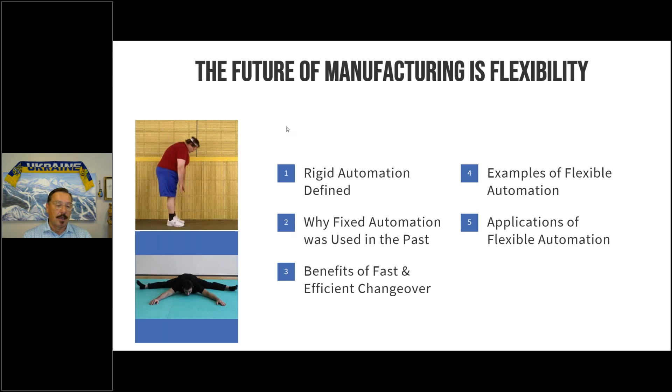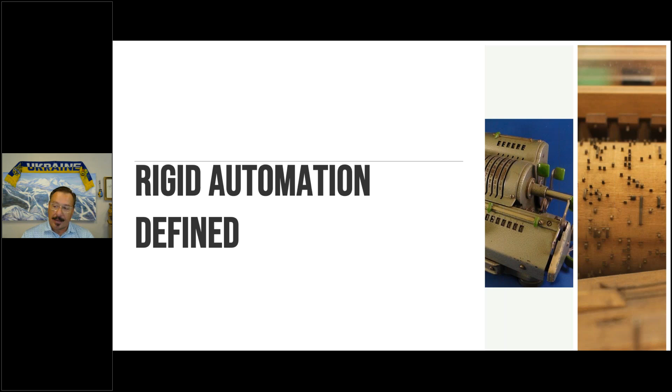So the first one is, what is rigid automation? What's the definition of it? I have two pictures up here on the slide which show you rigid automation, not necessarily for plastics, but historical. Rigid automation is something that is designed and used for one specific task. You see the counting machine on the left, and then the music making machine on the right. That's all they could do. They were not designed and could not perform anything other than those specific functions.

So what is rigid or fixed automation, and what are some of the reasons for it? It's automation that's customized around a single molded product. The handling of it, the way it's transferred once it comes out of a molding machine, the nesting of the products, if there's some kind of assembly work that needs to be done, inspection work - everything is designed for one specific product. Very little flexibility. The rigid and fixed automation was typically designed for a high volume, low mix type of production. So you produce that one part for years and years. It was designed to do high volume, so you could produce high cavitation. You could make a lot of those products all on the same system, but the system was designed specifically for that task. Changeovers were not possible or were very complicated.

The picture on this slide shows what you needed to do to get it to work. It took duct tape, it took baling wires. You had to do a lot of rigging to make this fixed or rigid automation workable on other products or on different applications. And it took a lot of technical expertise - almost to the level of needing a PhD to figure out how to get it to work.

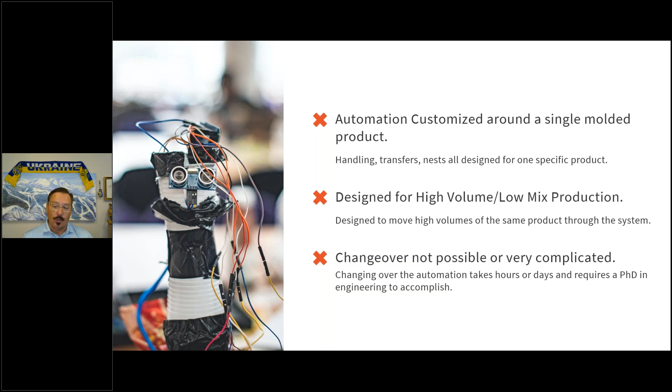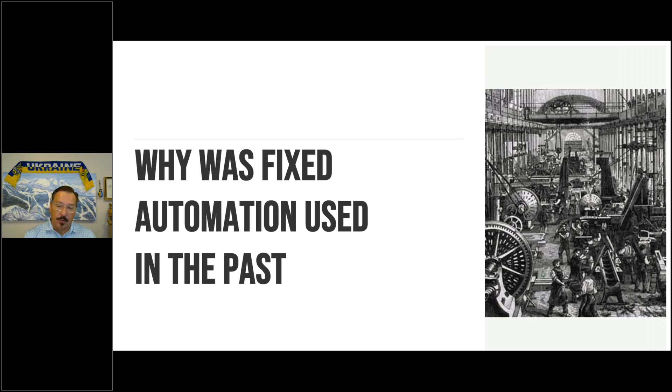So why was fixed automation used in the past? And when I say past, historically, the majority of automation was fixed. We've seen changes towards the more flexible automation in the last 3 to 5 years, with the biggest jump in changing over to flexible automation since COVID. I'll go through some of the reasons that we see that happening.

So why fixed automation? Why was it prevalent? Long product life cycles was a big driver. I have some examples listed here.

Televisions. In the past, you bought a television and had it for 10, 15 years. There were very few variations in televisions until fairly recently. Now every year there's new resolution coming out, new TV sizes, new features, wireless features. That's just an example of what's happening in industry overall.

The next one is mobile telephones. I remember the first phones that I had, and most everyone had a flip phone, and you kept that for years. Now every year Apple's coming out with the next one, the latest and greatest. Constant changes, so product life cycles are becoming much shorter.

Cassette tapes, same thing. Decades of cassette tapes, no changes. The molders running cassette tapes never had to change that automation because it was always the same size dimensionally. Nothing changed, so you just kept running it with the same automation.

The final one is the big brands with food products. An example is Kraft Philadelphia cream cheese, and the other is Kraft mac and cheese. The mac and cheese has been out there for decades without a change, and now Kraft is looking at changing the name, the recipes, the packaging, which has an impact on how it's going to be molded.

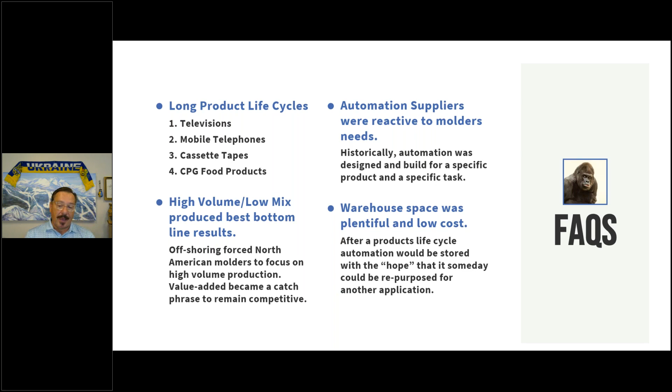It stays in the warehouse until someone decides they need that space and calls a scrapyard, and then it's junked.

So shorter product life cycles for a molder means there's going to be changes. You will not be able to run that same product for 10 or 15 years as you did in the past. Contracts now are sometimes renewed every year and sent out for bidding every year. So in a year's time, that automation may be obsolete for that specific product, and it needs to be changed over to something new or put into that graveyard in the warehouse. So flexibility is critical.

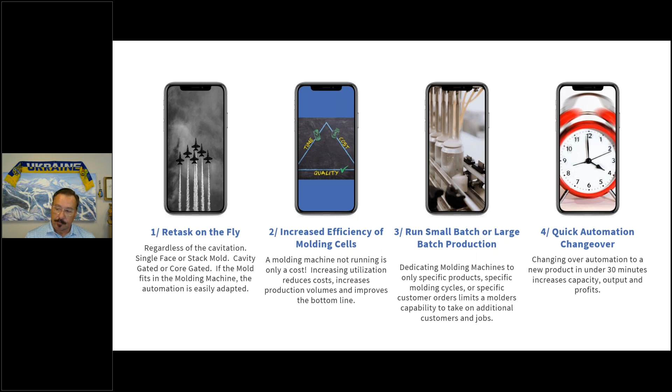Now I'm going to go into some examples of flexible automation. So I'm going to hit on some of the biggest ones that we've used and the applications. There's other ones out in the market that are being used. Some are a little more specific for different applications, so I kind of use the ones that are the most general and most wide used.

It's important to pick the right automation for the application, and each of the four that I'm showing here, and I'll go into more depth on these and show examples, are specific to certain actions that the automation does.

So the first one is takeout robots. What we supply is high-speed side entry robots that are very versatile and flexible and designed for maximum capabilities. So as I said before, whatever will go into the molding machine, this automation is easily adaptable to run that type of a product. One of the other items why this is a side entry and why we focus on side entry: in the past, we've built quite a bit of top entry automation. And what we're seeing in the market is a lot of people going away from top entry automation, primarily due to safety concerns. Not wanting employees to have to go up high in the air or need to have special safety harnessing or special safeties in place to use the top entry types of applications. So the side entry is something that we're seeing a lot of movement towards.

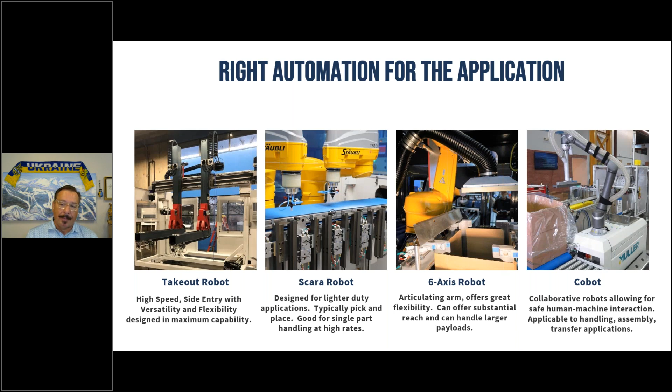Now I'm going to show you some examples of actual applications. The first one is the side entry takeout robot.

Hello, I'm John Taggart, Vice President of Engineering, Muller Technology, Colorado. This is the inline robot. It was a joint development between Muller Technology, Colorado and Muller Technology, Switzerland, with the goal of developing a platform that could be rolled out worldwide.

Hello, I'm John Taggart, Vice President of Engineering at Muller Technology, Colorado. This is the inline robot. It was a joint development between Muller Technology, Colorado and Muller Technology, Switzerland, with the goal of developing a platform that could be rolled out worldwide.

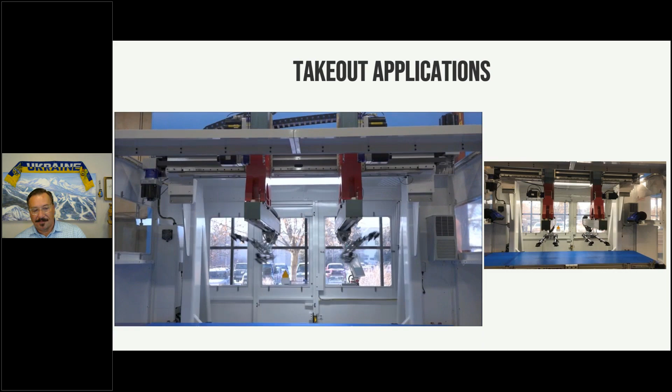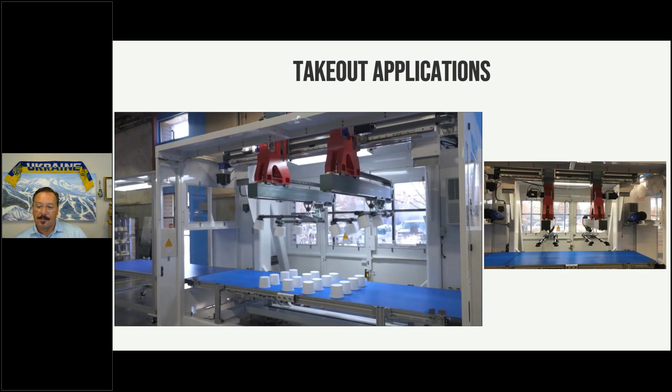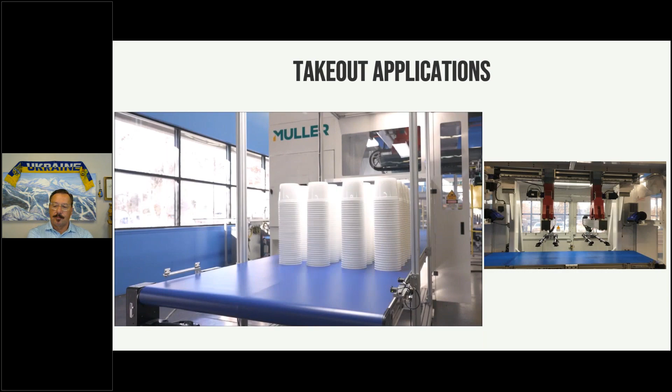Our goal in designing this side entry inline robot was to make one robot capable of running with any mold you put into a molding machine, whether that's a stack mold, single face mold, inside gated, or outside gated. This robot can handle any of those mold configurations. It's capable of stacking up to any number of parts you want, and that's recipe selectable—just change it and push the button. The robot has incredible flexibility with 4 axes on each arm, all motor controlled. Rather than multiple handoffs, we're capturing the part with one tool and placing it directly on the conveyor.

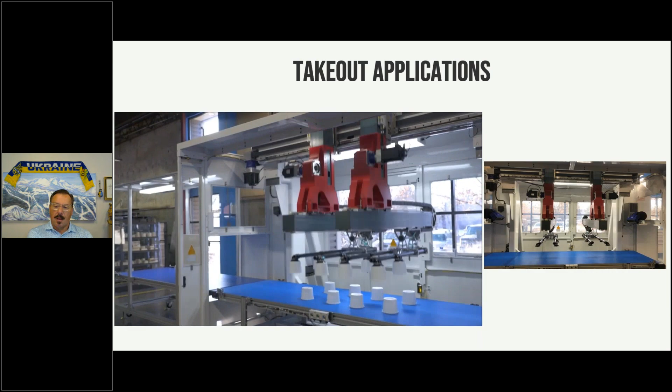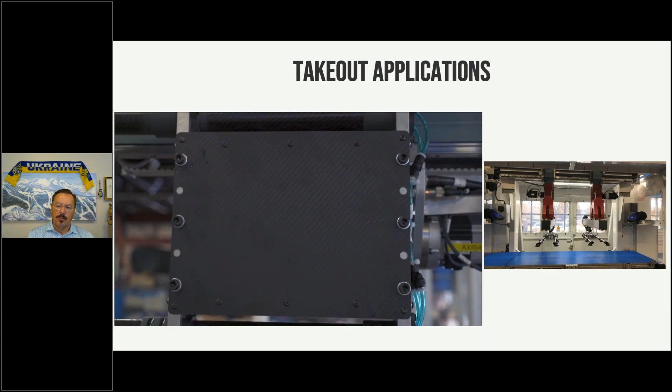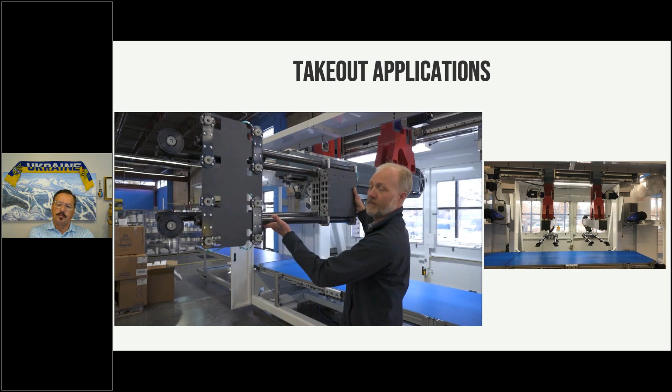For this new arm design, we've spent extensive time working on FEA to make sure we get stiff, stable arms that eliminate shakes. In addition, our tooling changeover has been greatly simplified. We're down to 6 bolts and air quick disconnects on the back—the entire tool comes off, then you can bring a new tool in. Tooling is lightweight, one person can hold it up, dowel pin to align it, put it in place, put your 6 bolts back in, hook your air in, and you're ready to run. We can accommodate anywhere from 1 cavity up to 48 cavities. Very flexible, very lightweight, very fast, very rigid.

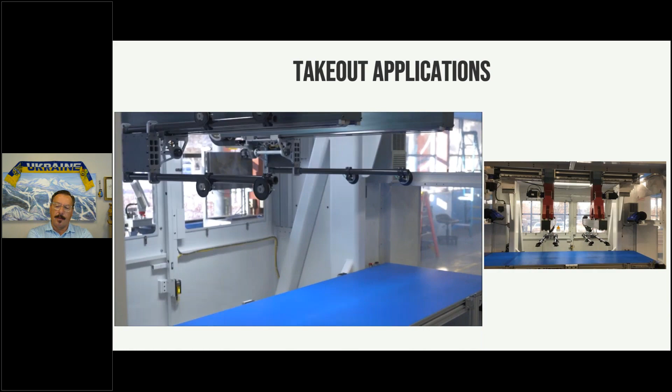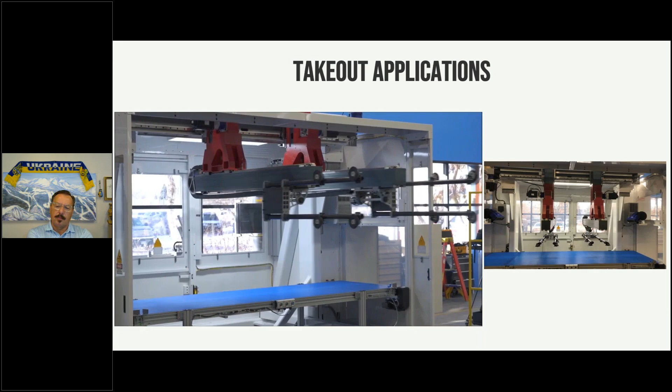Our end-of-arm retrieval carriage has the capability to rotate a full 180 degrees, and this is what allows us to pick either face of the mold with either arm. That's recipe selectable at the HMI—you just tell it which mold face you want to pick off of, and it will home accordingly, pick off that face, and move forward.

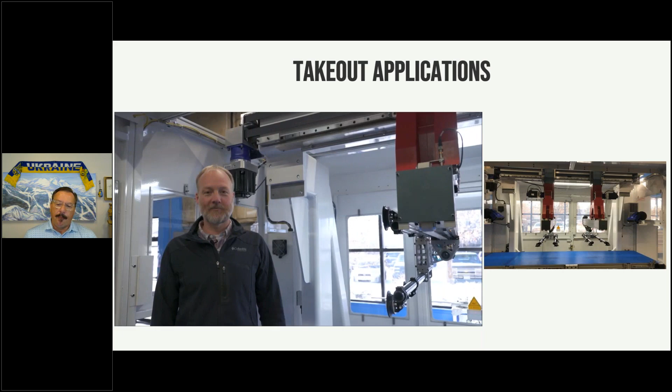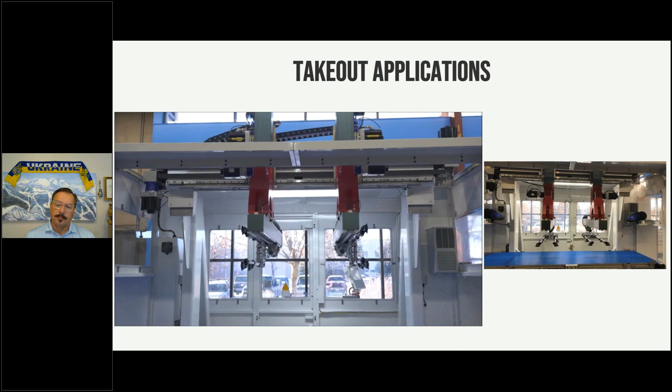For each of our arms, we have independent servo control in the strip stroke direction, or the clamp direction of the mold. There's a motor that drives the belt and gives us full control over where that arm is when it's moving in and out of the system. Once we're in position, we're always verifying with the linear transducer that we are in position so we're sure it's clear to go into the mold. In addition, if your mold center line height changes, we have a separate bolt pattern that lets us move our entire traverse beam up and down to adjust the center line of your mold.

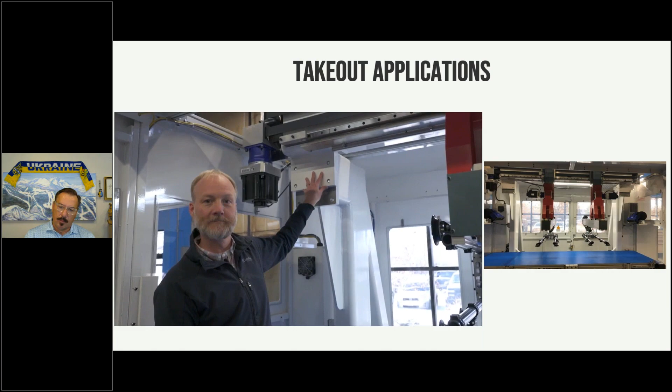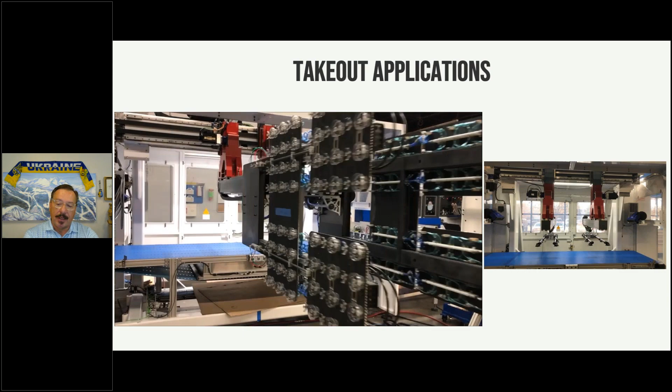This is another application that I'm showing, actually running in our shop. Our customer will not let me show you the actual product—this is for a 2-piece closure molded in a family mold. We actually take out both products at the same time and then use the automation to assemble the one piece to the base of the closure.

You can see the cavitation. This is the same exact robot that was shown in the previous video, absolutely no different in the base setup. The only difference is in the end of arm tooling.

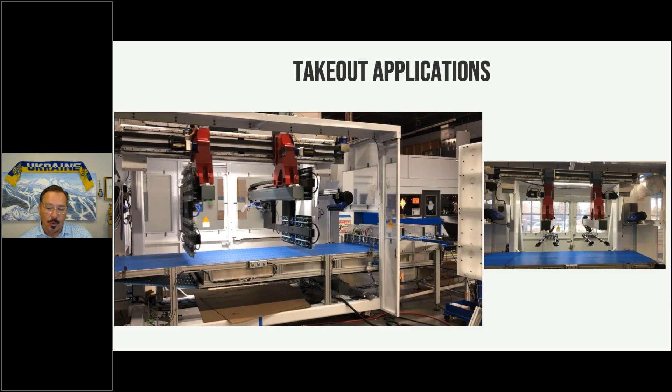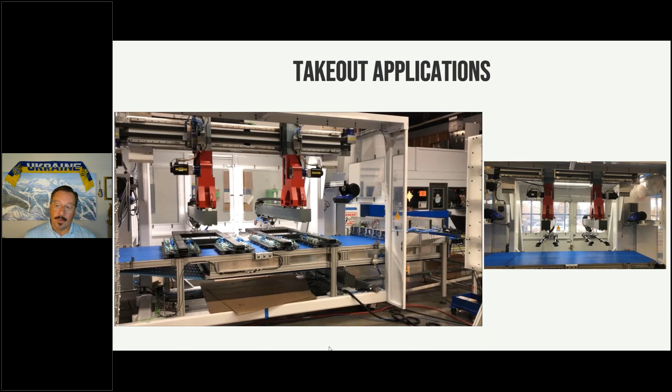The critical part with these takeout robots is the flexibility and versatility. You can run 2 arms if it's a stack mold. If it's a single face mold, you turn off 1 arm and the second one keeps running. We've built these up to 4-level molds where customers are running single face, stack molds, and 4-level molds all on the same automation. Customers with this type of automation are seeing utilization rates above 90% because they can put whatever mold needs production at that time into the machine, and the automation will adapt quickly and easily to run it.

The next one I'm going to show is the SCARA. This is the pick and place application. Here I'm showing it for lids.

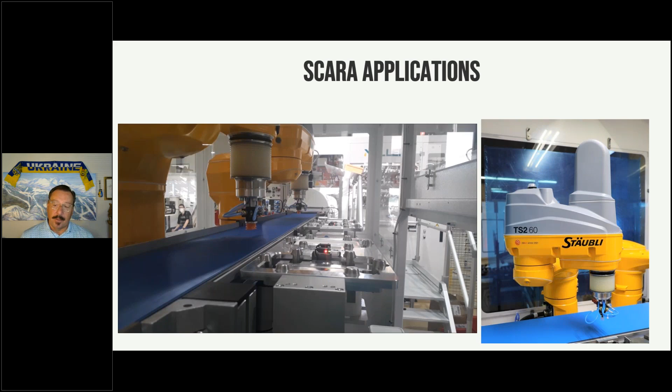The SCARAs that we use, we always use in conjunction with a vision system, so you can see the flashing at the far end of this video. The vision system takes a quick picture of each part, and as you can see, some of them are not oriented in the same direction, and you'll see one coming up that's quite skewed. The vision system sends a signal to the SCARA, which rotates and puts it into position so you can put it into a stacker, or if you're doing assembly work, the correlation between the vision system and the SCARA lets it do that alignment adjustment on the fly, again with high speed capabilities of 90 to 180 parts per minute.

The next one is the 6-axis robot. It has a lot of versatility, and in this video I'm going to show a number of different applications. The important thing to notice is the 6-axis is all the same, but the applications are very different, which shows the flexibility that's possible with the 6-axis.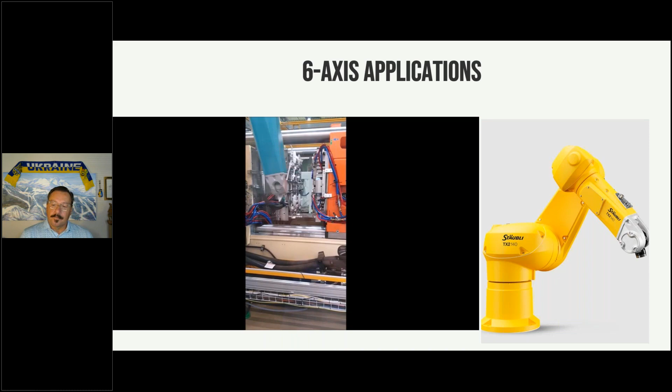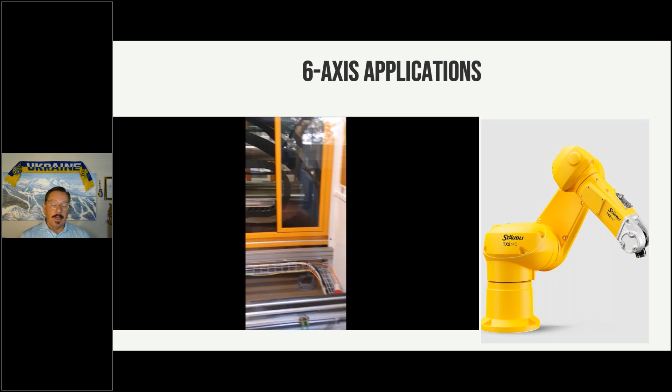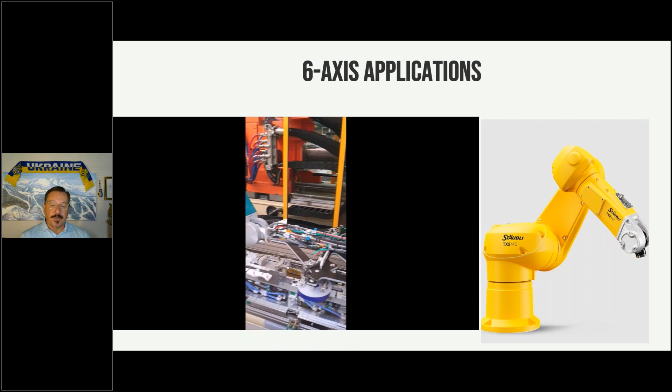So here, takeout. This is a hinged closure or hinged top. Pure takeout, placing it into a fixture, which will then go on and close that hinged top. Fairly simple application, just going in with a strip stroke using vacuum or grippers to grab the part out of the molding machine.

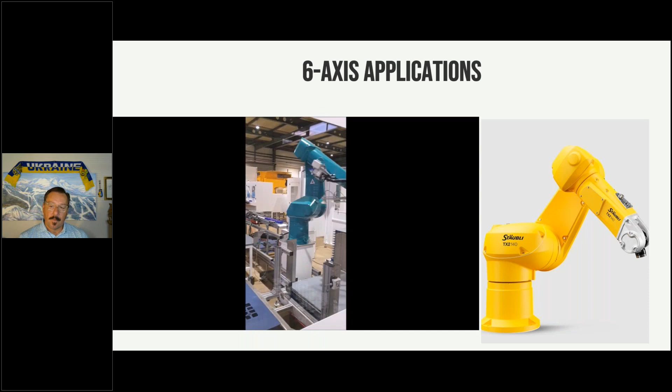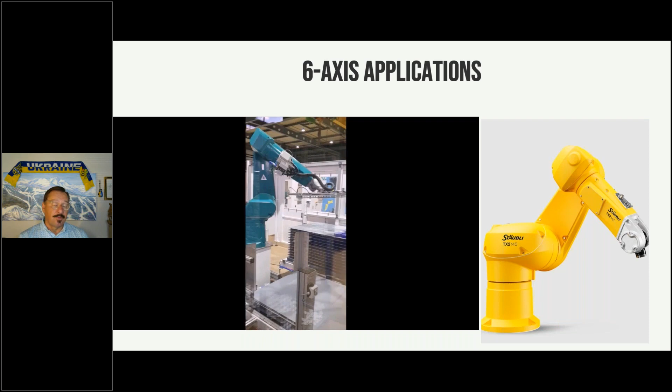Same type of robot here for palletizing. Placing a slip sheet for the next layer, then going onto the conveyor that's feeding the parts, picking up a row of parts in the orientation for palletizing, moving over and building the layer. The only real difference between the takeout and this palletizing is the end of arm tooling and then the programming, but very much flexible for different applications.

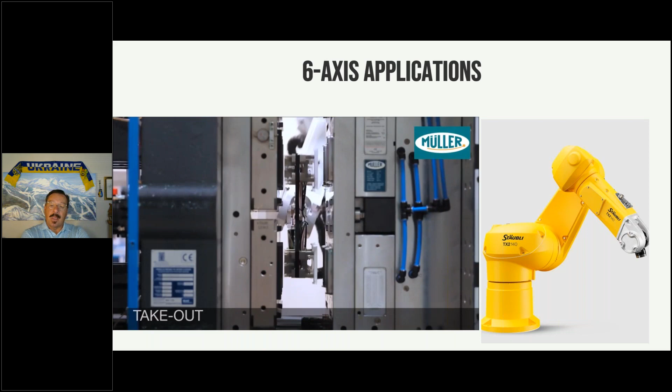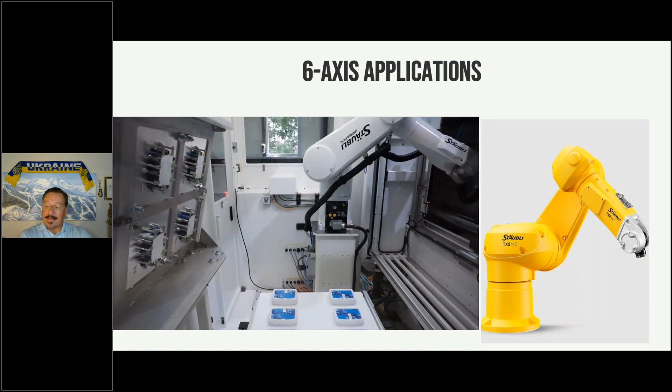This one is for an IML, in-mold labeling application. The 6-axis robot is taking labels from a label magazine, placing them into the mold cavity, taking out the finished product, and stacking the finished product when it is complete. Again, the only change out is in the end of arm tooling.

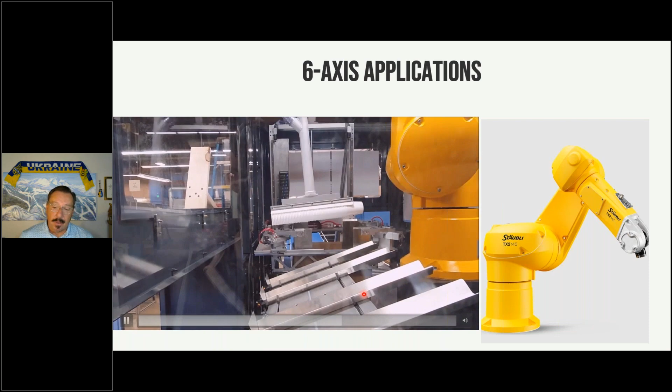Another application for a 6-axis: in this case, we're using a vacuum head, picking stacks of containers and case packing them. These case packers that we build are designed for different orientations in the box, different cavitations. You can see these trays, you can slide them together, move them closer or further apart. For the 6-axis robot, it's all positioning in the programming. You can pick as many different trays worth, different heights. All of that is a simple change out in the end of arm tooling.

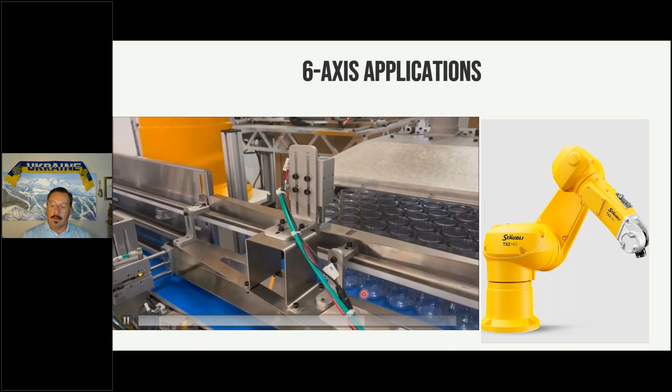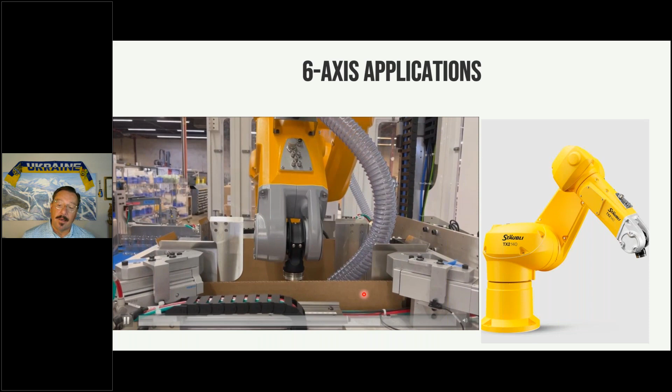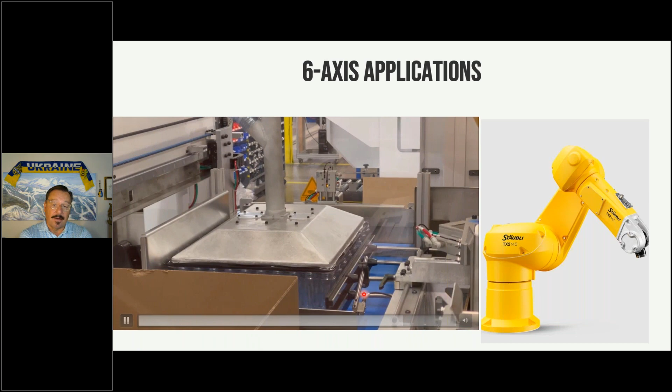The next one is a blow molded container. Here you can see the blow molded containers being sent single file into the system. We build a row, build an array, and then the 6-axis robot picks them up with a vacuum head and places them into the box, for different box orientations and different numbers of bottles in the box. The only change out, again, is the end of arm tooling and programming.

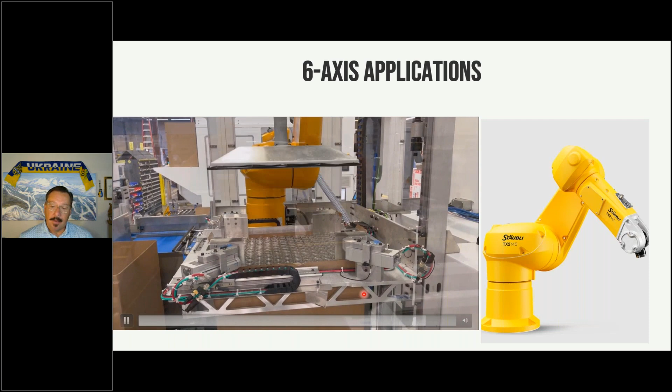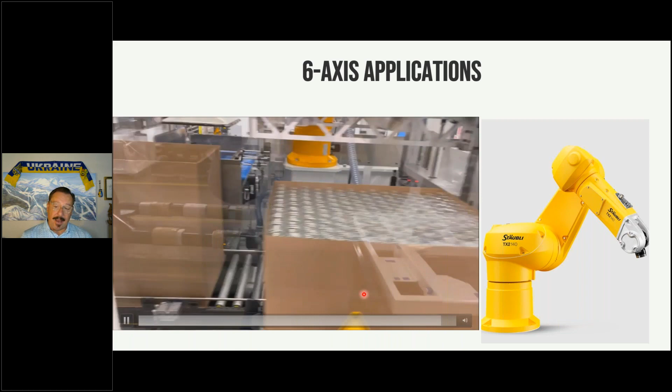So if this particular job went through its life cycle and was no longer being produced and molded, this 6-axis robot could be easily converted over to the IML application, to a takeout application, or to case packing of container applications with a very simple change out.

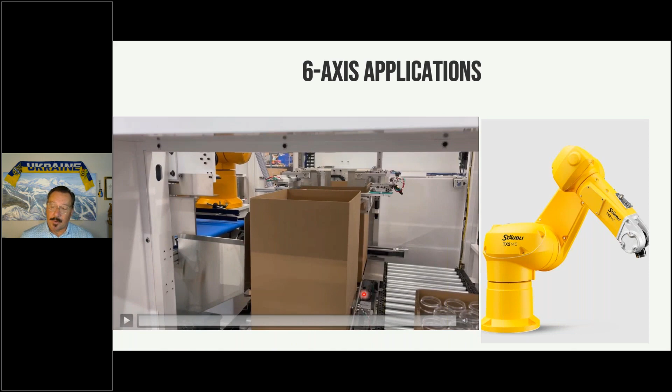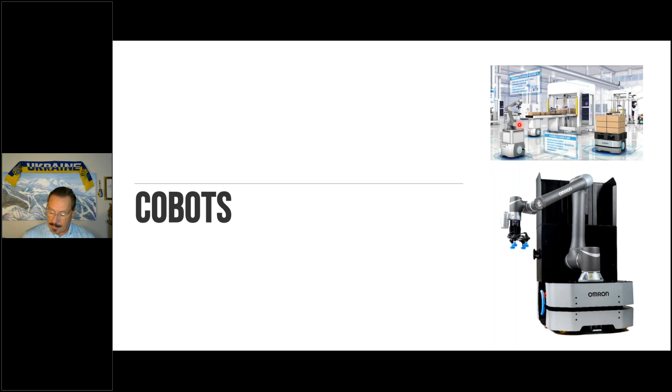Now I'll show you some cobot applications. These cobots that we supply are mounted on a self-standing unit which has all of the power, the air, and even the HMI built into the unit. This unit is either on casters or could be moved with a pallet jack.

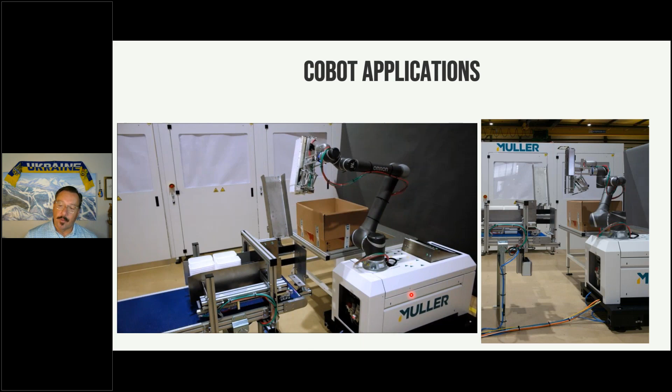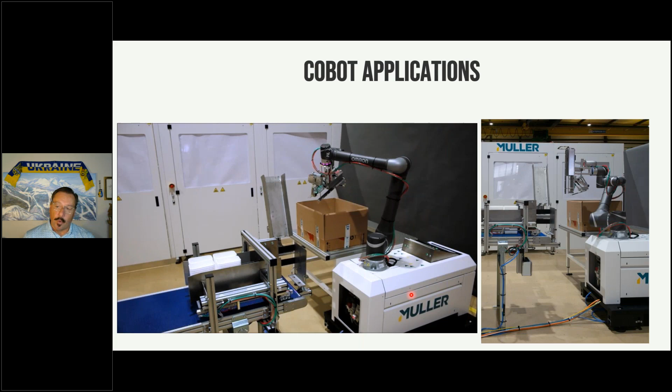The cobot here that you see is using a mechanical gripper. You can use a mechanical gripper, a pneumatic gripper, or vacuum, whatever is needed for the specific application. You can see it now moving in a slower motion - that is the collaborative motion, a safe motion so that if an employee comes near it, there is no chance of injury.

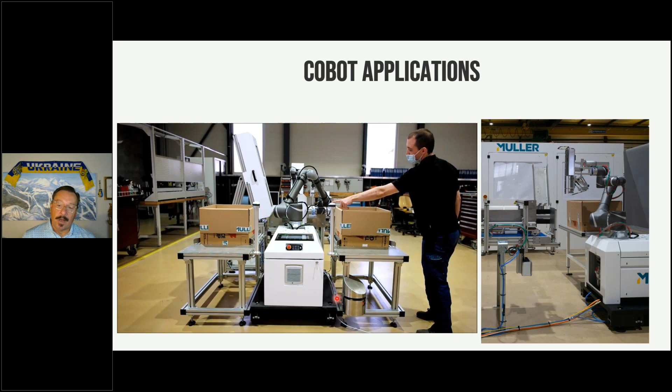This is another application showing it using a vacuum head. Here at the bottom you can see a scanner - this is the safety scanner. Once a person enters the area within 6 feet of that scanner, the robot goes into a collaborative slow mode. Then the operator hits a button on top indicating he's leaving the area, and the cobot can move back to fast movement.

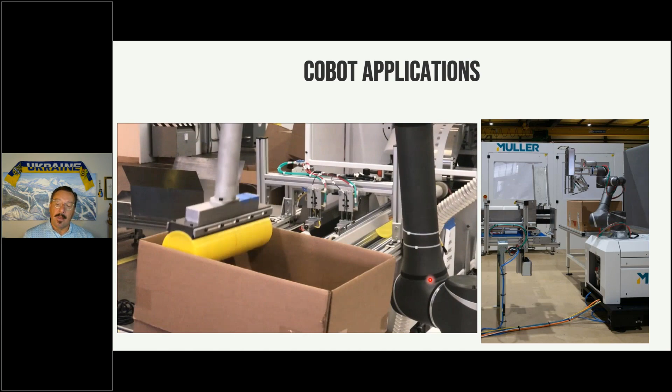Here again, using a vacuum head with a high flow vacuum, picking lids off of spin bars and case packing them. Again, very versatile - the only difference between all these applications is in the head, the end of arm tooling. The rest is all standard. It can be moved from application to application with fast changeouts, where you're just changing the end of arm tooling - looking at 5 minutes to a half hour at most to change the automation from one application to another.

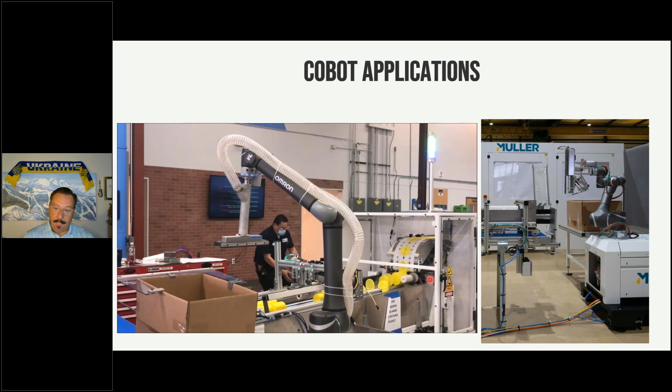So to summarize, what does flexible automation do? One of the biggest things is higher utilization - the molding cells are not limited to one product. Scheduling becomes very open and easy, based on molding machine availability rather than specific product availability. You can retask on the fly, changing over from 5 minutes to a half hour.

It increases competitiveness because you're able to produce on more molding machines. You can change faster, deliver to the end customer faster, get to market faster. As I showed you, the only thing changing out on all of this automation is the end of arm tooling. You can enter a new market in 10 to 12 weeks at most - that's the lead time to design and produce new end of arm tooling.

So if a customer has a product they want to get to market in 12 weeks, 10 weeks, sometimes even less, highly flexible automation lets you get to market much sooner than with something like I mentioned, with lead times of 30 to 40 weeks just for the equipment to come in and then be set up. So it reduces fourfold the time to enter a new market.